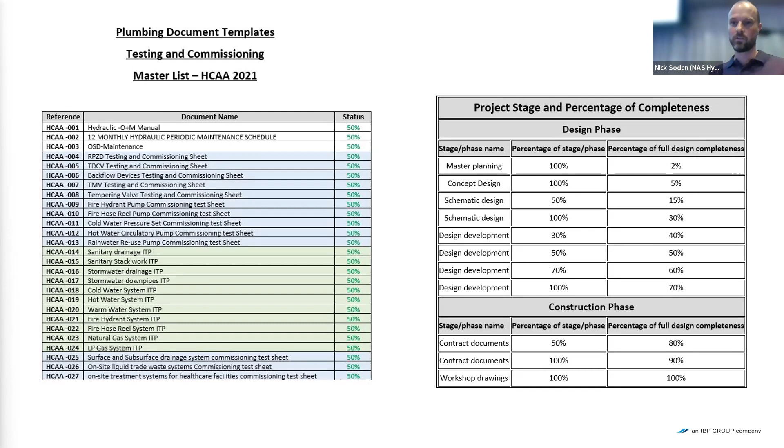Yeah, so if anyone actually starts using them - because I can talk about them, but maybe no one will use them - but if you do, and you see room for improvement, don't hesitate to email those requests through, and we'll plan to keep updating them.

So yeah, the fortnightly CPD sessions, just a reminder to email M. Because we haven't been here for 2 years, the New South Wales government did up the requirement from 15 points a year to 25. So to maintain our registration with the government, we now need 25 points a year. The general gist, which a lot of people have already heard, is 1 point per hour of content. So if it's coming tonight, you'll get 2 points. For attending a CPD session, you'll get 1 point.

So the CPD sessions benefit both the affiliates and the engineers, because we need those points to maintain our registration. You also need to, it's not M's job to log your points. You log into the portal on the website, you upload whatever it is you've done, your subscription to Plumbing Connection, because that's 4 magazines a year, so 4 points a year. Whatever way you want to get your points, it's your responsibility to jump on the website, lodge proof of whatever training you've done, and then those points will accumulate, and you can download a CPD certificate off the website, provided you're compliant.

So when you renew your registration with the New South Wales government, you can send that certificate through to prove that you're compliant. And if you have any issues, again, call us and we'll show you.

So these guys probably didn't know, but I don't know if Dave's here. Dave spent a long time at Rehau, and as happens with some businesses, there are some changes, with all the COVID rubbish and everything else, but Dave's now over at Caroma. Do I officially call it Caroma or GWA? Either or, okay. So I know a lot of people here know Dave, and then obviously Chris was at Kembla and is now at iPlex. Oh, sorry, Vinidex. I got that wrong. Okay, so I've done a plug for iPlex, but it's actually Vinidex. So I apologize. So anyway, iPlex get a plug. But I'm sure everyone knows Chris. So just block that logo out of your mind.

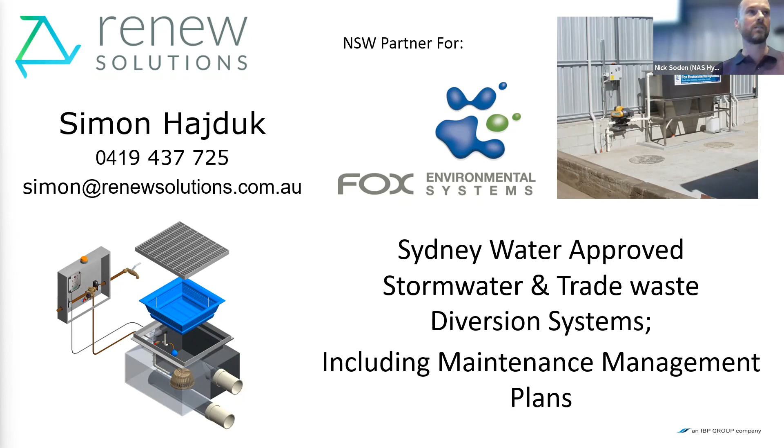Okay. So the diploma has officially started. We've mentioned this online, but if you haven't been on 20 online meetings, we've been waiting. Where are you, Rod? We've been waiting 6 years for this moment. We've got 160 students enrolled online. Waiting. They're not all doing the course. They're waiting. We've put a call out, Rod's just put a call out for more people to put their hand up to teach. So Rod would talk you through how to get accredited to be able to teach. But we definitely need more people to put their hand up to teach.

Is that online, Rod, or is it a combination of face-to-face and online? Oh, the actual teaching though. The teaching is all online? Yep. Yep.

Okay. And I believe we have Ty here. So Ty, do you want to stand up? Because Ty didn't get to, because I think it was all on COVID. But Ty was our first cadet, because we've got 3 cadets. I don't know if there's any others here tonight. Anyone that's a student, you're welcome to stand up. So I think you got 30 in the first batch, Rod, out of that 160-ish. Okay, so we had a few dropouts.

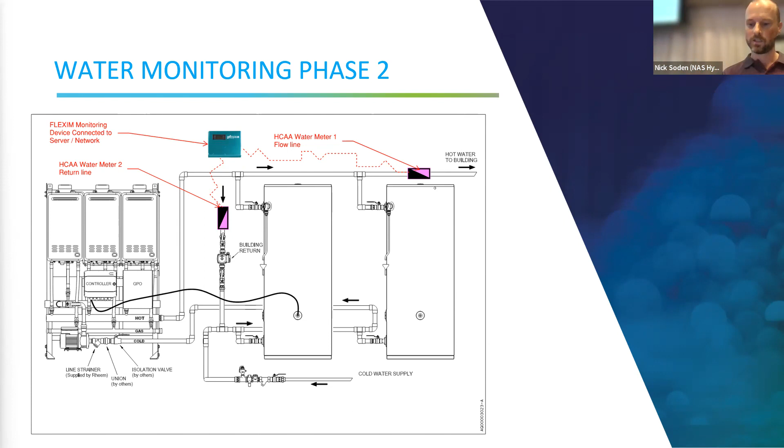So this one here, I don't know if Dave wants to jump up for a bit, but myself, I've been on the committee for 10 years. I've been serving in the role of president for about 6 years, and I am finding it quite hard. I'm now running my own business a bit over a year now, but I've spent, without boring everyone, 2 days last week on the gas standard, I think a day before that on an ABCB meeting, a day the week before that on a New South Wales government meeting, and then the role here at HCAA, it is a volunteer role, so we don't get paid anything. So even driving down from Port Macquarie, but I took that on and I enjoy it, and I've done it.

I've learned a lot from this role, and I've really appreciated it. So to everyone here, thank you for supporting me. Thank you for the support of the association. I'm not stepping down from being part of the association, but I am stepping down as president. And when we merged into becoming a national body instead of state-based, we then moved to a slightly different structure. So under that structure, every 3 years, we are aiming to rotate the roles of directors, the role of the president. We don't have to do that, but the idea is, like with a business that runs quite successfully.

I used to work with Dave at Wood and Grieve, and they had a rule that you couldn't sit on the board if you're over 55 years of age or something, because they want to keep the board young. But there's all different theories out there. But the 3 year thing is to try and bring new ideas in, to bring new enthusiasm, and hopefully I brought a lot of enthusiasm over my 10 years. But yeah, I've got 2 kids, I've got a family to raise, and I guess I'm just having to say I need to step back for a bit, but I'll let Dave jump up and say a few things.

Whoops, what have I done, Nick? Scroll down.

Okay. Not all risks are the same. They're not the same. And what I'm saying to you, when you look at buildings, you can't always just go, well, happy days, I'm going to build it 10 metres from the building. I want you to consider risk when you design. That's really the first message. And dig into the informative appendices, which I encourage you to do, because there's a lot of stuff in there that's kind of interesting, we hope, and helps with design and clarifies things.

So the first part to take away is, I don't think you can just go happy days, it complies with the standard, anymore. First of all, I should have said, these are the opinions of Mark Porter, not necessarily those of Fire and Rescue New South Wales or anyone who's got any legal experience, et cetera. But risk is an issue in today's world, not just commercial. And AS 2419 gives you options about compliance, but it's not saying they're all applicable in every circumstance. That's the first take home message. Okay.

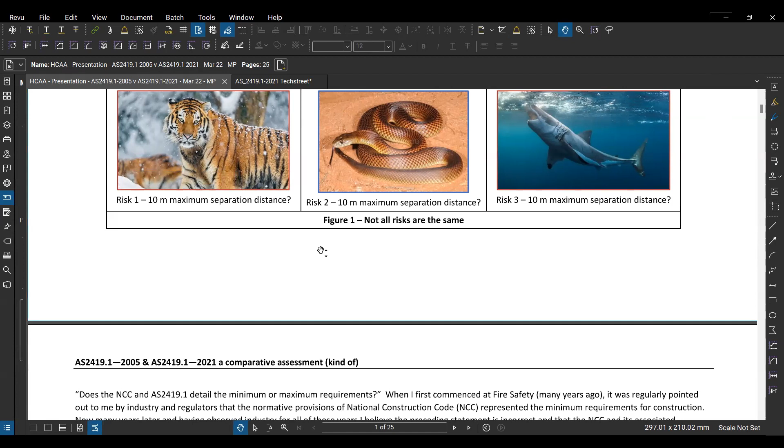Let me see if I can work this thing. Okay. Now, I'll have to read this. I'm sorry, and I apologize if people can't read this. Okay, I'm just going to read from this.

Do the NCC and AS 2419 detail the minimum or maximum requirements? When I first commenced in fire safety many years ago, you can tell I'm an old guy, it was regularly pointed out to me by industry and regulators that the normative provisions of the National Construction Code represented the minimum requirements for construction. Now, many years later, and having observed industry for all these years, I believe the preceding statement is incorrect and that the NCC and its associated standards are interpreted by industry to represent the maximum requirements. To emphasise this point, the following comments are offered.

One of the most common criticisms from fireys in the field is that they cannot read the information on the block plan. How could this be, as an A3 block plan has been provided? The answer lies here. Irrespective of the size of the building, the amount of information required to be detailed, the light availability and the position of the block plan, in the majority of cases, industry has determined that an A3 size block plan is the maximum size.

Now, I look around here, there's a lot of people with glasses on. There's a lot of fireys wearing glasses too. Now, it is unbelievable how much information industry can squash into an A3 bit of sheet pressed metal, whatever you do with your plastic, and fireys just go, well, we can't read it. So AS 2419 2021 is saying, yes, there's still a minimum size, but now it's prompting you to make it a bit bigger so people can read it.

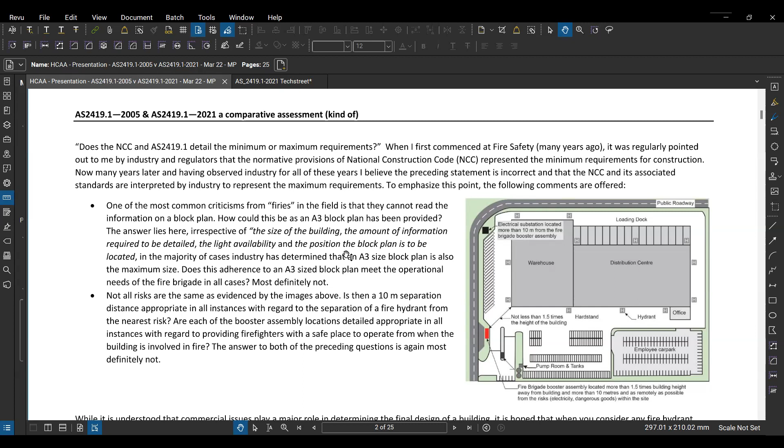Sorry, I'll just read the last bit. While it's understood that commercial issues play a major role in determining the final design of a building, it's hoped that when you consider any fire hydrant system design, the questions you ask yourself are not just about does the design conform with AS 2419, but rather how effectively does the design treat the risks associated with the building or site and support safe and effective fire brigade intervention activities.

Block plans larger than A3 everywhere. AS 2419 details a maximum scale to encourage block plans. Fire brigade booster assemblies located as remotely as possible from the building or site risk. Appendix P of AS 2419 hints the booster assembly locations may not be appropriate in all instances.

To conclude, in regards to this risk space, it is hoped the provisions of the AS are interpreted by the members of the Hydraulic Consultants Association to be what they are, the minimum requirements. They're not the maximum. And I understand, I totally get it. I've got some eyes on me going, well, Mark, you live in bubble world up the front there, because in our world of dollars and cents, they are the maximum.

But what I'm saying to you is to manage risk. And again, what's interesting is every time a building gets on fire, it ends up in coroner's court. The people involved in that space all of a sudden realise it's a different game. So my thoughts on risk is that bit there.

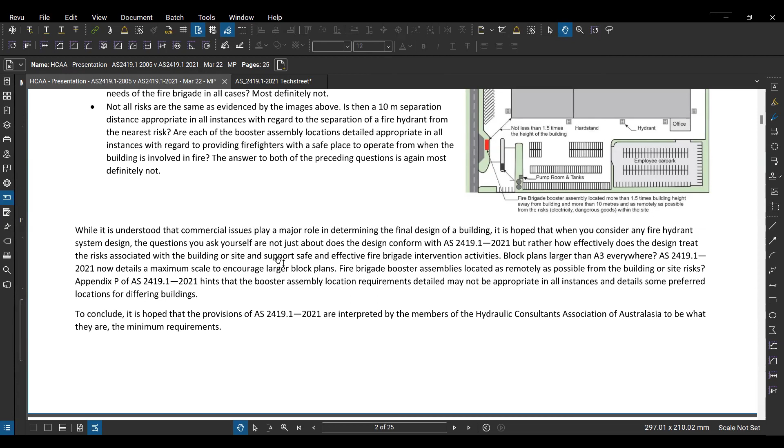When you get to this document, I give some broad guidance on general changes, and then there's the tables that follow as specific. So we'll probably get through this page and that'll do us.

Where possible, all items have been grouped. For example, table 3.3 of AS 2419/2005, number of outlets required to discharge simultaneously, is now included in section 2. It didn't make sense to the committee that you've got a hydraulic table talking about number of hydrants required to flow in section 3, which is about location. So one of the things the committee tried to do was group like with like, and hopefully we succeeded. The other classic example is pretty much all the other signage requirements have been put in one spot in section 11. So if you go, what signs do we need for this building, let's go to section 11 and we'll find them. It's in ancillary items and stuff like that.

AS 2419 now has 12 sections, where 2005 had 10. The new sections created are pipework design and installation, and pipe supports. So all we did was split the basically existing section into 3 and expanded each of them. So there's a lot more prescription in those things.

Where possible, a more consistent structure across sections has been applied, for example, to align with clause 7.2 when a fire brigade booster assembly is required, at section 7 that's in the 2005 standard. We've added new clauses in section 4 and section 6 for when an on-site water storage tank is required, when a fixed on-site pump is required. What we've tried to do is structure up the document so over the longer term, people start to get a feeling of, oh, that's the water bit and that's this, and there's some sort of consistent structure across sections. Obviously there's variation, but there's been an attempt to, yes.

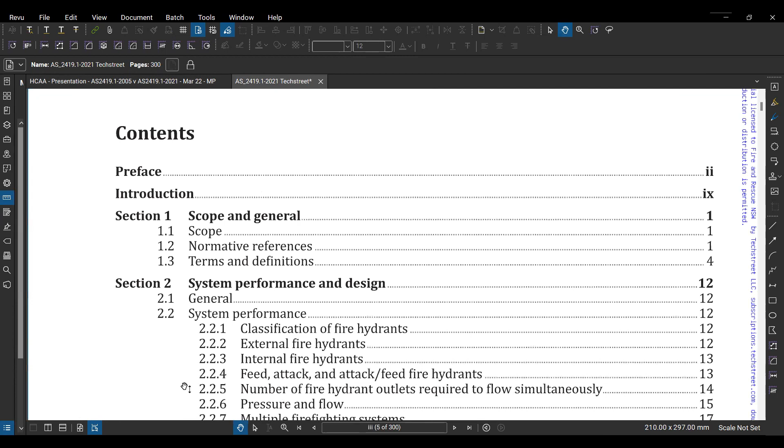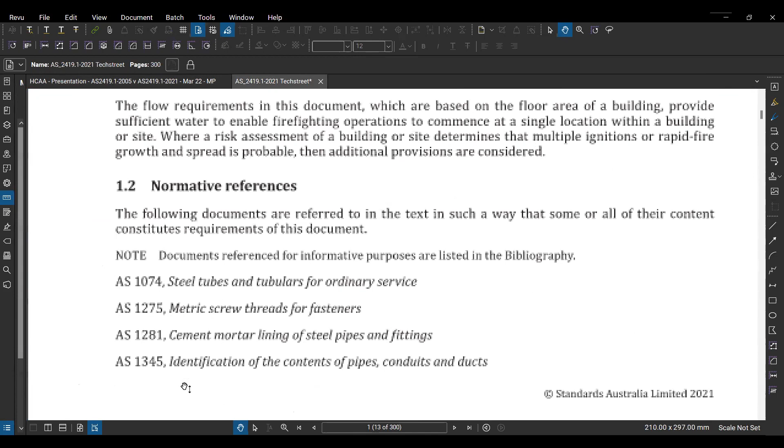I'm not sure if anyone's really familiar with 2005, but clause 7.4 is an endless series of paragraphs you can't make reference to, you know what I mean? So if you end up in this document, you will find - I can go a bit further.

Okay, it is written... but if you look there, it's got A123. So the standard's essentially been written like the NCC wherever we could. So if you want to make a non-compliance statement about an internal hydrant, you can say the non-compliance was clause 224A2.

So the whole document is tried to be written in that way so that when you design or inspect and want to make a comment about compliance, I'll reference clause 7.4 in 2005, which is about a page long. It's got points 1, 2, and 3, and then about 10 paragraphs after it with multiple points in each. So if you wanted to say your booster assembly didn't comply with clause 7.4, you'd have to say paragraph 6, second sentence, etc. So it's much more structured and formatted so that in compliance terms, you can make reference to points a bit easier.

The underlying general theme of the standard is sprinkler protected buildings good, non-sprinkler protected buildings bad. That was basically the rationale for one of the key drivers in the standard. And it was interesting that the ABCB took part of it and threw it into their NCC 2019, but they forgot to take the bit about external hydrants.

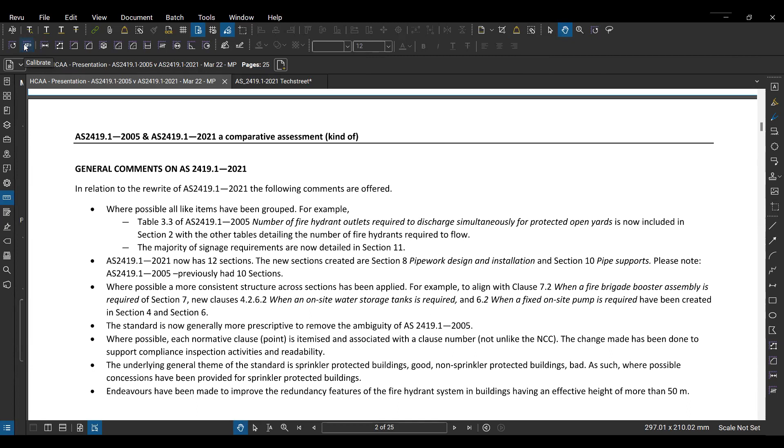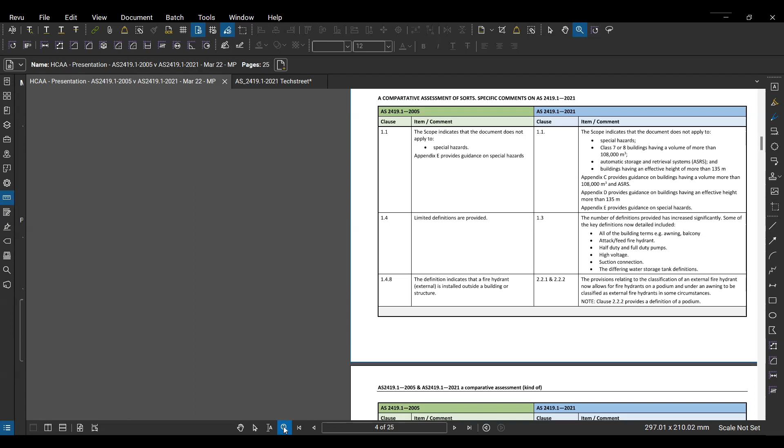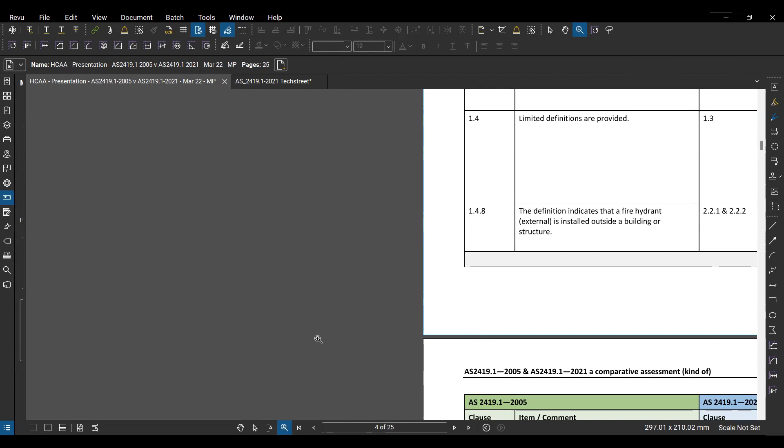Yep, all right, so I'll talk to the scope and then that's basically me done. If you look at the 2005 standard, the scope indicates that the document does not apply to special hazards. If you look at the 2021 standard, it still doesn't apply to special hazards, but now also doesn't apply to class 7 or 8 buildings that have a volume of more than 108,000 metres cubed.

Now, you know how I talk about risk? In the special hazards space, when the fire services deal with industry, and industry has spent a billion dollars developing, they drag 10 people into the fire brigades, and we ask them, how many hydrants are you going to flow? Doesn't matter what the risk is, they'll say, we're using open yard tables 3.3 and that's 3 hydrants to flow. And we go, no.

So one of the things we did with the ABCB, or AFAC argued with the ABCB, was that you can't write AS2419 for every building being built. It is not possible. 3 hydrants to flow.

They've just built the Amazon large isolated building out in Western Sydney, which I sat in the first design meeting and I went, I know what's coming here, from the group of hydraulic consultants that walked in and sat down. We got around talking about hydrant system and they gladly rattled off all the provisions, ring main, blah, blah, blah, et cetera, 30 litres a second.

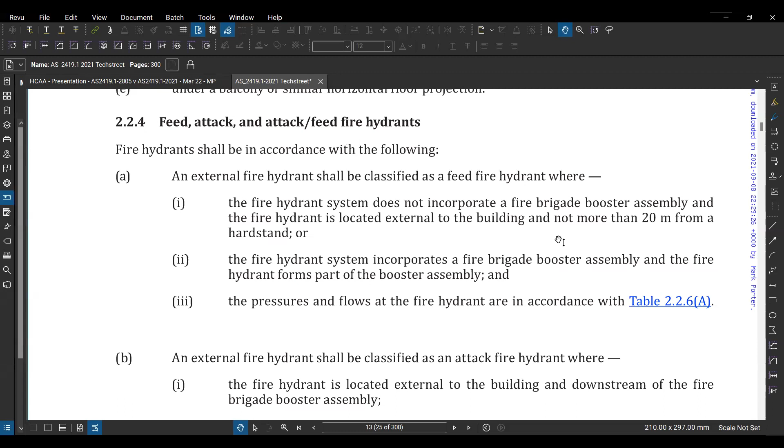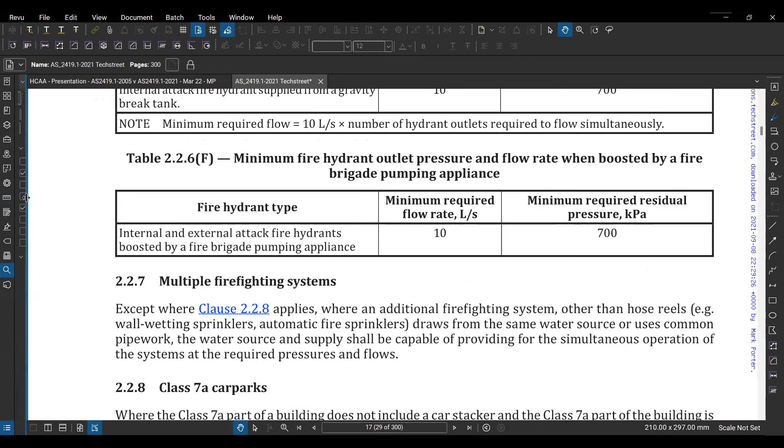Sorry, no. Just a couple. I don't know if you want to pull the files up or not, but 5.1, we've had a look through 5.1 in the current 2021. First of all, if there's any errors, it's Dave Woods' standard. Okay, that's the first one. It's probably more of an interpretation thing. So I think the way we read it was that you cannot use the existing fire hydrant in the building. Sorry, okay. I'm just struggling over here. Okay, 5.1.

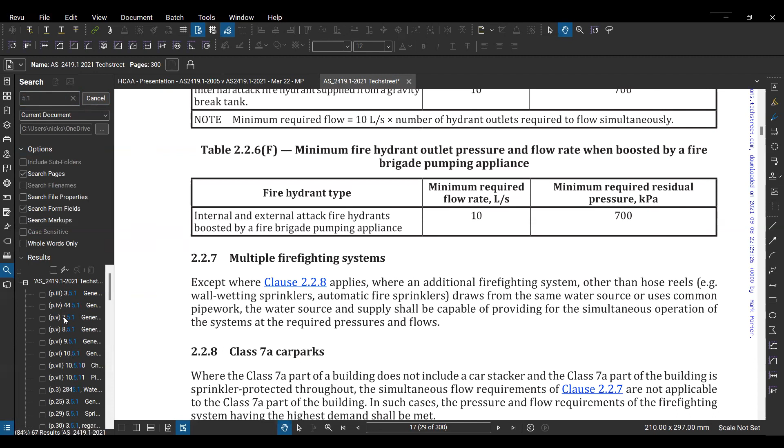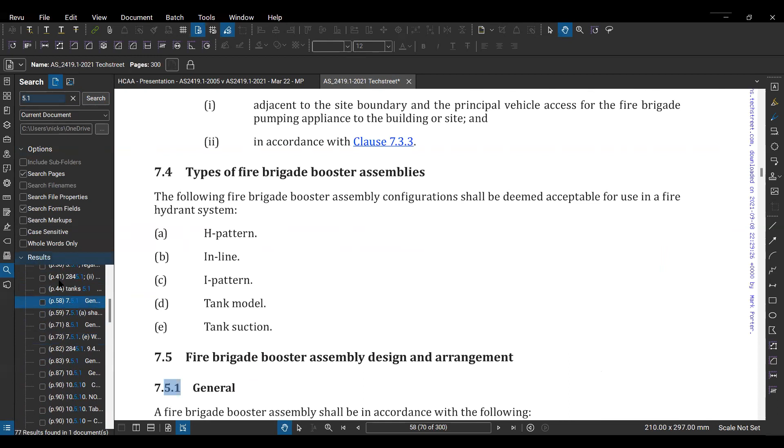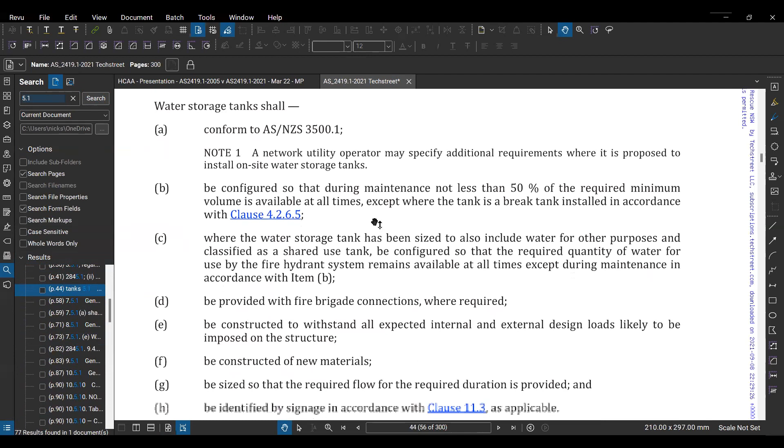The way that we read it was that you couldn't reuse an existing pipe or the tank of the building in an existing building. So the first point I'll say is this is for new builds. You've got to understand that when AS2419 or any Australian standard is written, I understand that industry operates in an upgrade existing building space. So what clause do we want? 5, part F, constructed of new materials. Do you want to speak to that one, Dave? It's already got a hydrant on the top floor. You have to replace the existing tank. Good.

Who would have thought, differing opinions in a room?

So this came about because the ABCB, can you remember the conversation, Dave? Because the ABCB wanted to get rid of reference to new materials. Why can't they use whatever? And then we dragged up a whole heap of standards currently referenced by the NCC that made reference to new materials, like the sprinkler standard. But basically what we're arguing was, again, this is for new builds, you can't then go, well, let's go and find the scrap tank from down the road and drag it in. This is not about an existing building. Fire and Rescue New South Wales would not go, oh, you're upgrading the building, you've got a tank there and the space is only this big and it's concrete. No, that'll just stay.

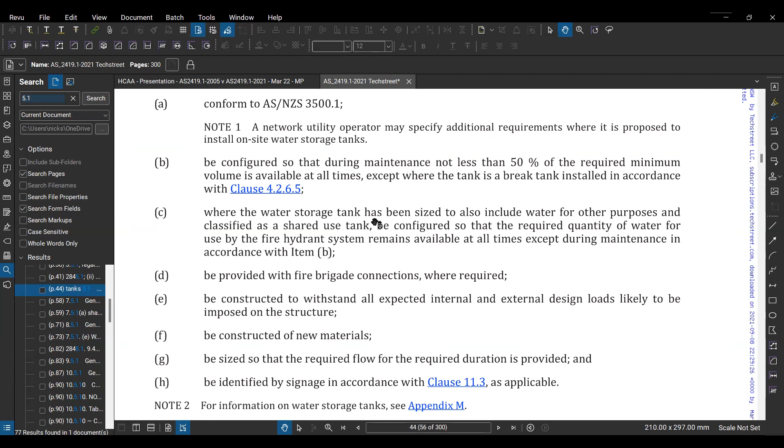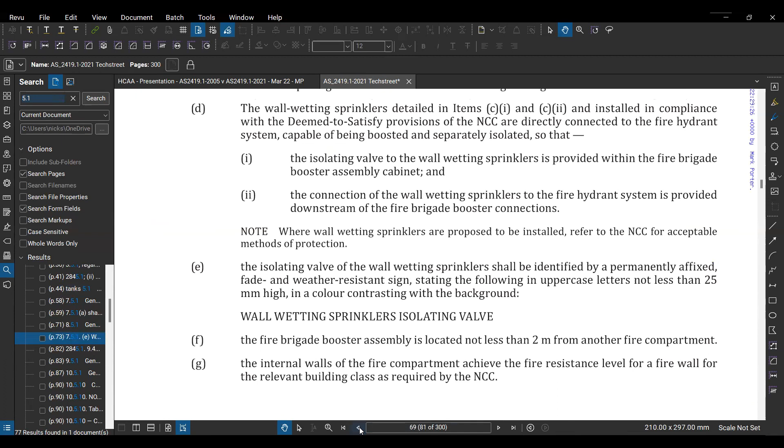And one other one, I don't know if you can jump to 7.3.4, Nick. We were pretty confused about this one. It talks about the number of boosters on sites, particularly where you have multiple buildings. Okay, so this is the cop-out clause, all right? So, no, it's 7. It's about multiple boosters. A bit further.

All right, so let's think about a university campus. So what you're trying to do is you're trying to write a design document for industry.

And you go, why are you laughing, Tom? I know this story already. I've listened to it a few times about this one.

So you go, how do we write something that can be applied? So obviously there's 3 possible solutions. One is you put a booster assembly at the site entrance and it serves all the buildings. Okay, that's easy and you can tick it off. Happy days. The other one is you put a booster in front of every building that requires a booster assembly because of flow or you can't get coverage.

Like think of a university campus, they've got big buildings and little buildings. So if there's a big building and it needs a booster assembly, you put it in front of those buildings. So they're the 2 easy ones. All right, so one at the main entrance serves all the sites, or one at every building that requires a booster assembly under the requirements of the standard.

Now, the third option is you go, well, you can just make up your mind. You can have a booster at the front that serves the front quarter, and then you can put some others around the space. You can't write that clause. It's not possible to write a prescriptive document and say that, because you may as well just say, do what you want.